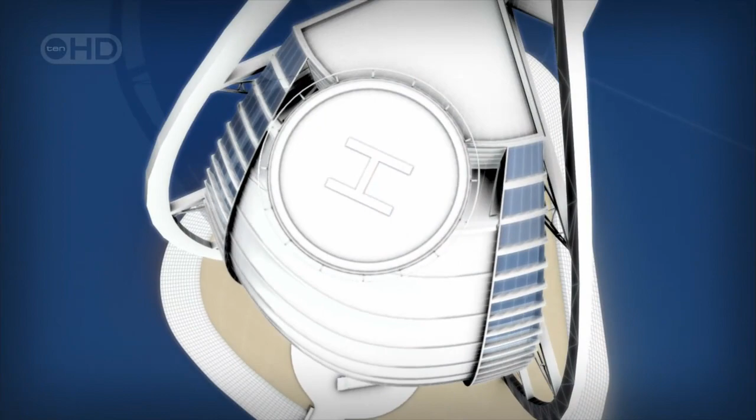He stakes what some speculate as over $1 billion on the tallest, most lavish hotel in the world, with a unique 7-star reputation: the Burj Al Arab. I think it was very important to put Dubai on the map of the world. There's no hotel like this hotel. It takes guts, and Sheikh Mohammed has a lot of guts.

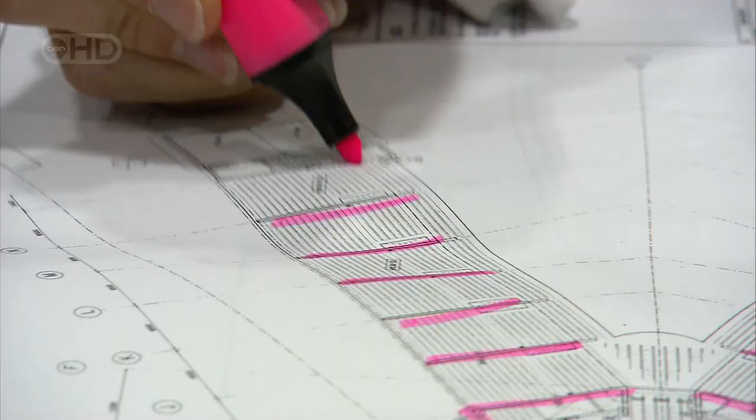The Sheikh's courage is clear from his choice of architects: a radical young team from Britain, brave enough to take up the challenge, but very short on experience. They are led by Chief Architect Tom Wright. We had an average age of 32, not a grey hair between us, and none of us had gone over about 15 stories. I was quite staggered by the scale and the immensity of the project. Tom Wright and his colleagues have a reputation for innovative engineering, but they're more used to designing schools and offices.

But Dubai is a place where connections can make all the difference. Through a contact in the ruler's office, the team gets its break. Sheikh Mohammed agrees to a meeting and is so impressed with their initial concepts, he awards them the contract. Now Wright must turn his sketches into a design so remarkable the building becomes a world-renowned landmark. We had many sleepless nights worrying that the building we'd designed wouldn't turn out to be at all iconic.

Wright knows he must push his design to the limits. A building only becomes an icon when its form is simple but unique. We decided that if you could draw a building simply with a few strokes of a pen, and it was instantly recognizable as not only the building but the place - Egypt in this case - you'd created something that was iconic.

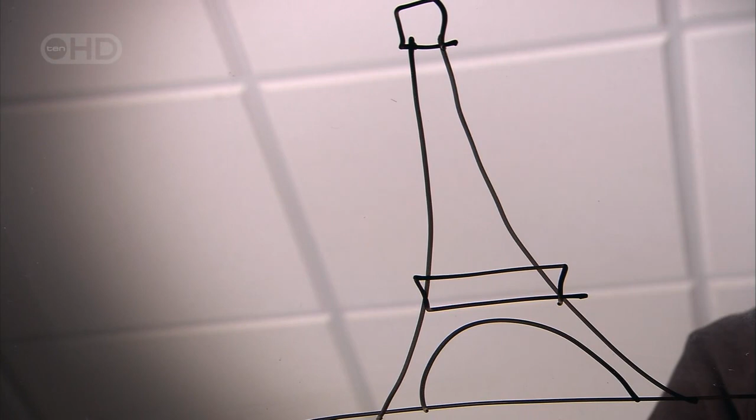So if you consider these buildings in the world, there are probably no more than 10 maximum that have actually achieved this status. Australia, Sydney Opera House. As with all these buildings, it's usually just the first couple of lines that actually make you know exactly where the building is. Paris - and you have to put a flag on the top.

Can Tom Wright and his team compete with the likes of Gustav Eiffel? This is a once-in-a-lifetime challenge. All the brainstorming pays off when Wright finally has his eureka moment. We were sitting there having a beer, watching a modern sailing yacht come out of the Dubai Offshore Sailing Club. You think of excitement, you think of exhilaration, and we went, hey, this must be the one. The form we came up with is very simple, and within a few lines, I think you can see that it has all the elements of an iconic building. It's simple and instantly recognizable.

The concept immediately catches the Sheikh's imagination. A sail billowing in the wind has deep meaning for the people of Dubai with their seafaring heritage. To complete the nautical image, Wright wants the structure to rise out of the water like a massive yacht. But this will require an island as a base, and there are none. Wright's undeterred—he proposes they build an island specifically for the hotel, a first for Dubai.

Constructing the hotel out at sea will significantly add to the risk and cost. Can Wright persuade his colleagues this radical scheme will work?

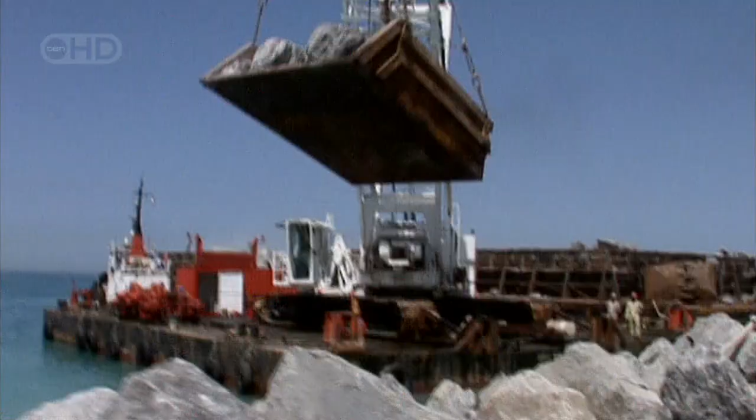By early 1995, the construction team is hard at work on Phase 1, building a low-lying island. But the inexperienced architects are about to get a taste of Dubai's extreme weather.

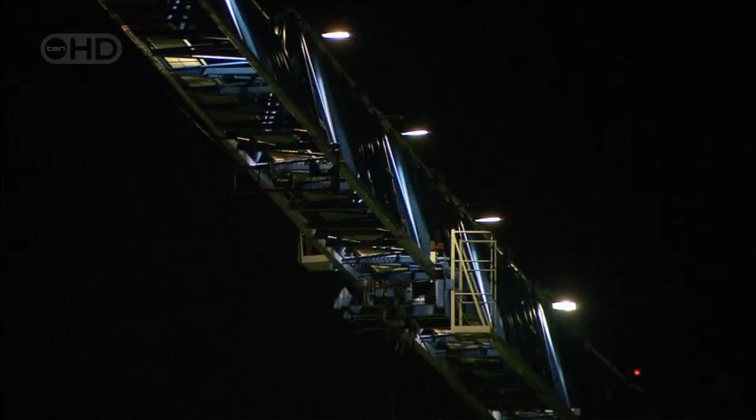April the 27th, a powerful storm known as a shamal sweeps across the Gulf, hitting the coast with a vengeance. A set of construction barges lie in its path, each laden with 10,000 tons of rock.

The architects have planned for all weather conditions, but the storm's intensity still shocks Simon Crisp. We had 3 or 4 metre waves bashing onto the beach. To see the waves coming in like this was really quite a wake-up call for us.

One huge barge breaks loose and slams into the mainland. The team realizes the damage this kind of storm could inflict on their island hotel. We had a really graphic example of how powerful the Gulf of Arabia can be when it's angry.

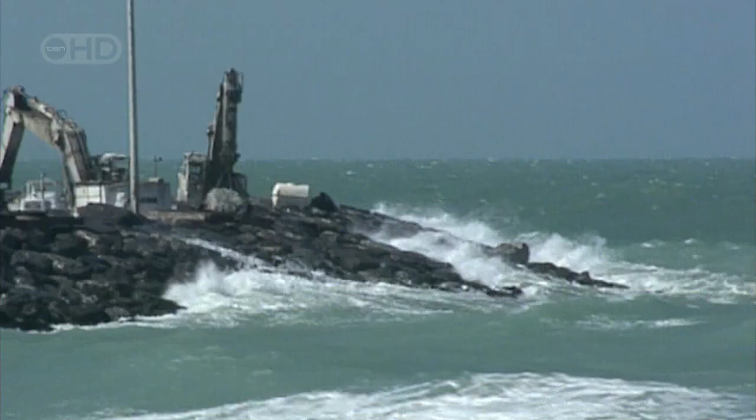The architect's decision to expose their structure to these forces could have serious consequences. The engineers will have to struggle to produce a low-lying island capable of resisting nature's fury.

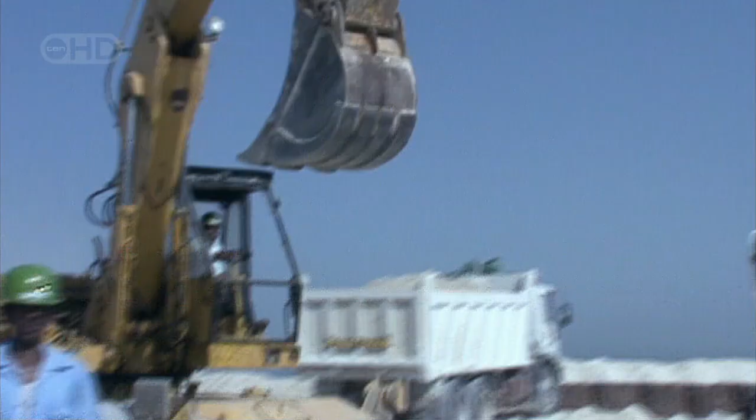The man-made island for the world's tallest hotel has hit a critical stage just 5 months into the build. Dubai's Sheikh Mohammed is depending on this project, the Burj Al Arab, to convert his country from oil producer to top-class tourist destination.

But a debate rages over the island's height. Architect Tom Wright wants to make it low to give the impression of a sail rising out of the water. We argued a lot about the height of the island. From a design point of view, I wanted people to be close to the sea.

From the start, he's gone head-to-head with engineer Mike McNicholas, who's responsible for the island's safety. So I wanted the island as low as you possibly could, skimming the sea. I'm coming from the other end—I needed to make sure we were protecting the island.

McNicholas's worst fear is that waves breaking over the island could damage the hotel or even drag guests into the sea.

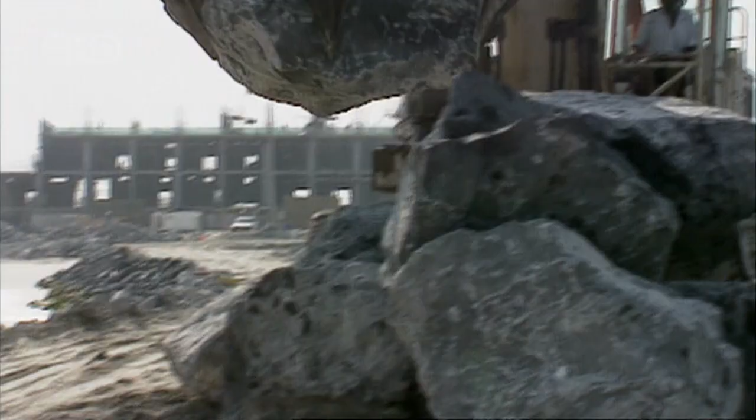Initially, the engineers planned to build the island using rocks. They are available locally and the technology is proven. But Wright rejects this—a rock island would have to be far too large to repel the sea safely.

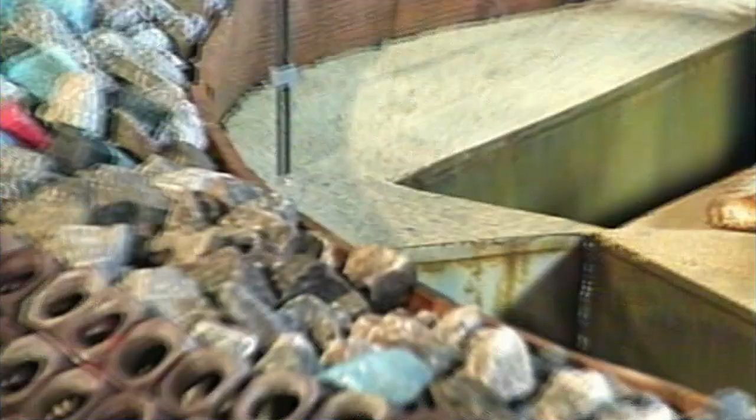To keep the island low, McNicholas experiments with pioneering concrete blocks designed to reduce the impact of waves. But no one in the Gulf has ever used these blocks before. I had to insist with the team that we carried out tank testing. It was the only way we were going to be sure that the island would be safe.

These tests replicate the power of the tallest waves that can occur once in 100 years, sending them crashing into a series of differently configured models. 3 weeks of testing prove the hollow blocks will work.

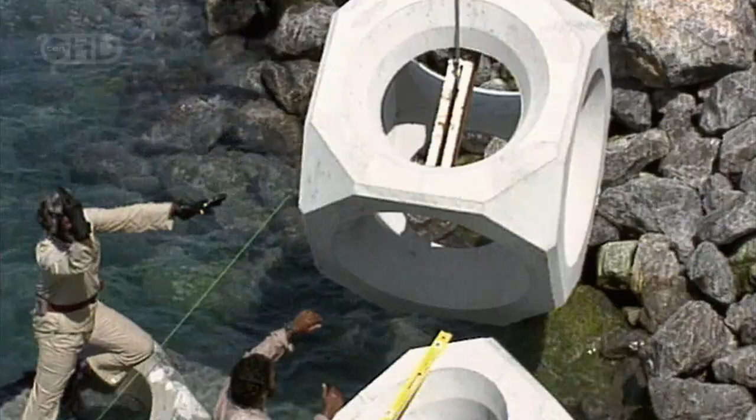The construction team builds the island with steep rock slopes, then covers them in concrete armor to absorb the force of the waves. These ingenious blocks work like a sponge—as the wave hits, the water passes inside the space and turns around on itself. The force is largely dissipated.

With the engineers' help, architect Tom Wright has won his battle for a secure island that rises only 7.5 meters above the waves. Now the team begins the second stage of construction.

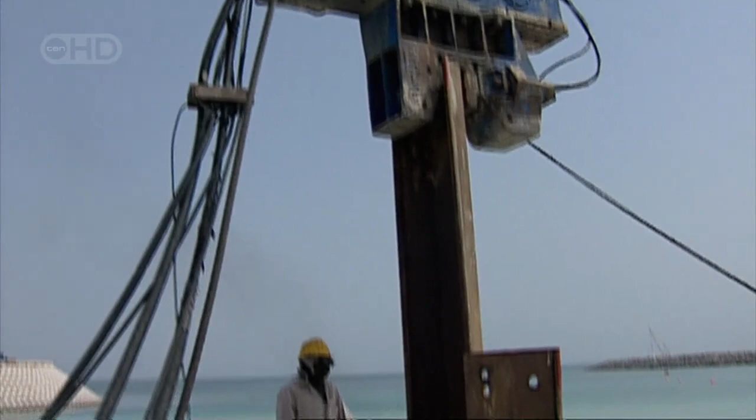In the center of the island, construction workers drive huge lengths of steel 20 meters into the ground. This creates a triangular steel wall known as a cofferdam, which will become the outside of the hotel basement once they excavate the sand from inside.

But removing the sand could be dangerous. That was a real challenge for us. It's sleepless days and nights, seven days a week, figuring out how we were going to stop the seawater coming into the structure, and stop it coming around our structure from beneath and flooding it.

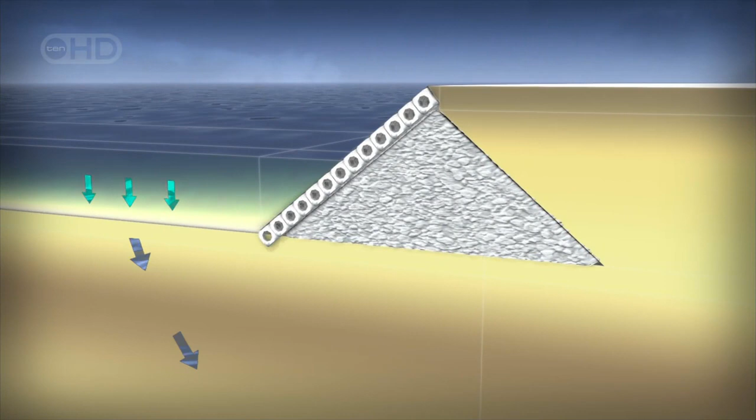The weight of the sea is a huge force on its bed. This pressure forces water through the sand and threatens to flood the artificial island from beneath.

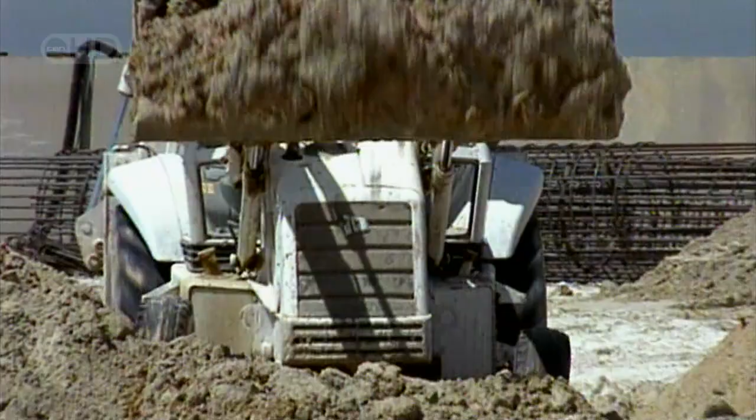To keep the sea out, McNicholas injects liquid cement into the sand to seal off his steel wall from below. But as the sand is removed to form the basement, there's less and less weight to hold back the force of the sea. The cement seal is going to be tested to the limit. In the worst case, the pressure caused by that water movement could have blown the whole bottom of the excavation like a champagne cork.

If McNicholas's calculations are wrong, the excavation could be swamped, killing hundreds of workers. But he stands by his design. With the cement seal in place, the excavators begin to remove the sand.

As the man responsible, he's not going to let the workers face the risk alone. I felt I had to be one of the first guys down at the bottom of the excavation, looking up 10 meters above myself, thinking, each side of this cofferdam is 7,500 tons of sea pressure pushing in.

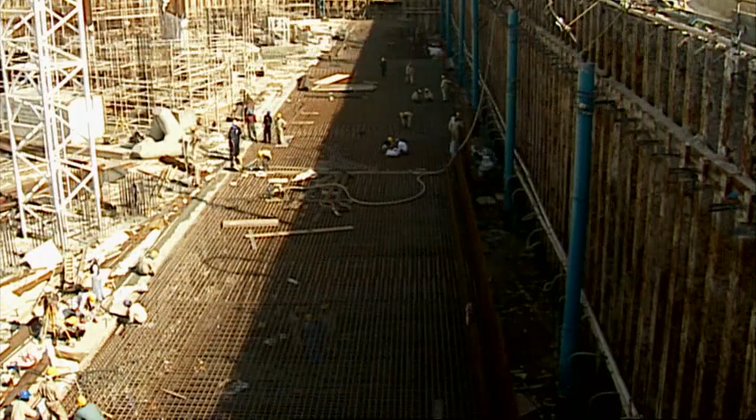When put to the test, both wall and seal hold firm. And one of the probably proudest moments of my career was being stood on that excavation and looking around and seeing the steel wall there surrounding me and thinking, we are holding back the sea. My design worked.

November 1995. The artificial island for the tallest all-suite hotel in the world is now complete. The construction team starts phase 3 of this one-off project, the foundations. The support needed for any skyscraper is vast.

But the location of the Burj Al Arab presents an added challenge. It had never been done before to build something like this on reclaimed land. We're talking about a 300-metre high tower on a man-made island in 6 metres of the Arabian Gulf.

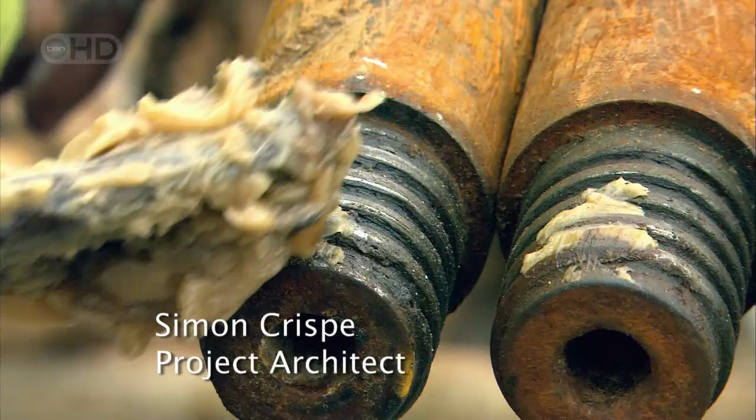The problems multiply when the results of earlier core tests reveal bad news. The team searching for bedrock drilled deep into the seabed, but even a full 180 meters down, there was no solid rock. This will make their job tougher, but the architects remain defiant.

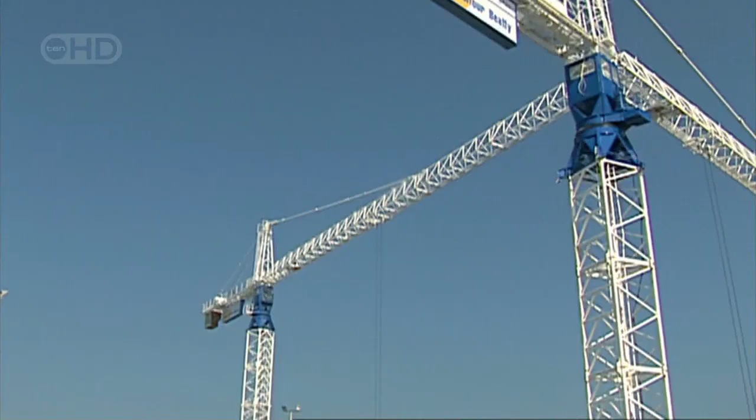The average person would think we're crazy to build something like this on sand, let alone out in the water. How will this 300-meter structure stand firm against earthquakes and winds of close to 150 kilometers an hour when its foundations depend on nothing more substantial than sand?

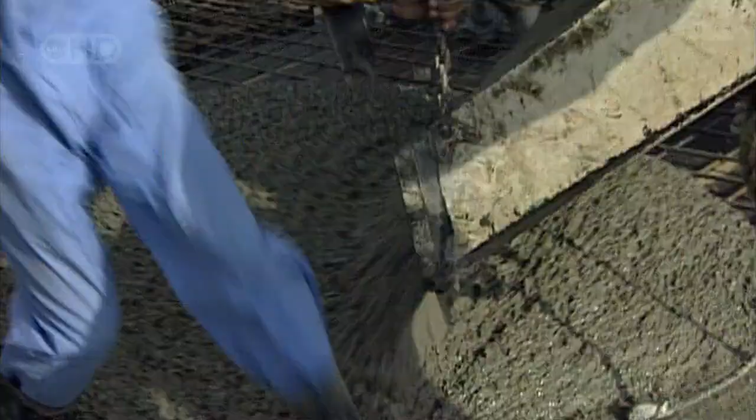On an artificial island 270 meters off the coast of Dubai, construction workers are preparing the ground for the tallest hotel in the world, the Burj Al Arab. But there's no bedrock beneath the site to support the foundations for a skyscraper.

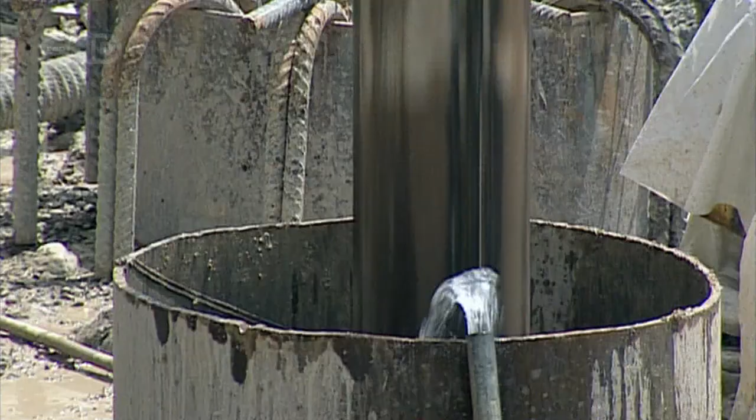The architects have a plan. They want to support the Burj using steel-reinforced concrete foundation piles drilled deep into the sand. So what's to stop the whole structure from just sinking? They are relying on an effect known as skin friction, the resistance that stops two rough surfaces slipping past each other.

Skin friction is all about the contact between the sand and the surface of the pile, and the longer the pile, the further in the ground it is, the greater that effect. I'm going to demonstrate it now by whacking it in. You'll see it starts to move quite quickly with the first few impacts. Now it's starting to stiffen up a bit. Even though I'm not hitting it any harder or any softer, the skin effect is starting to really kick in here.

Once the friction between the post and the sand around it equals the load of the hammer, the post comes to a halt.

The scheme will only anchor the Burj if the sand is compacted enough to create resistance around the building's piles. The drillers pack sand samples into sealed containers and send them off to be analyzed. If the results show the sand is too loose, then support on the piles anchoring the building could suddenly fail.

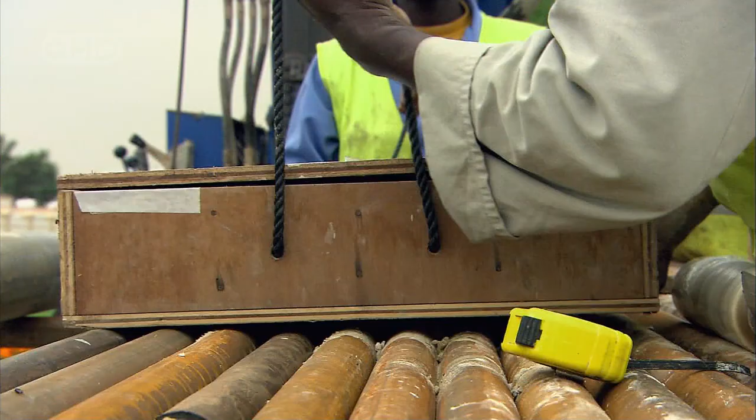The geography of Dubai gives everyone reason for concern. It lies within range of a major fault line, so this soaring megastructure could be vulnerable to earthquakes.

In June 1964, a 7.5 magnitude earthquake hits Niigata in northern Japan. Because the area is built on sandy silt, the tremors flip over entire apartment buildings. This isn't normal earthquake collapse. It's a devastating phenomenon known as liquefaction.

As grains of loose sand shake, they fill up any air pockets and compact, taking up less space. The ground stops behaving like solid earth and acts like a liquid. On shifting sand, any building could simply topple.

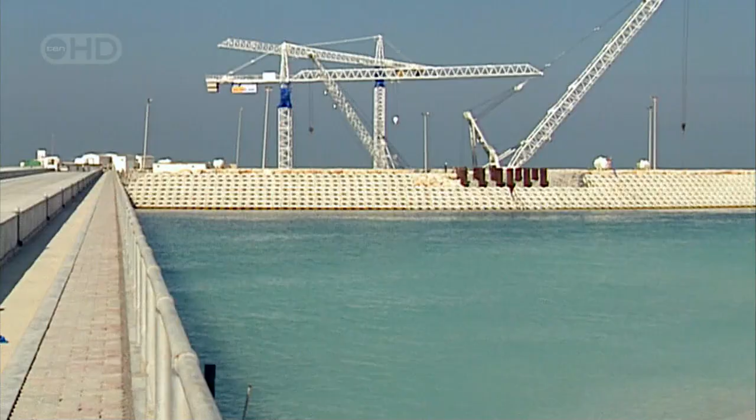When the results of the drilling tests return, it's good news. Deep beneath the site, they find compacted and calcified sand. Liquefaction is not a threat. But will the foundations be long enough for the skin friction to hold them firm? We weren't going to take any chances, and we extended the piles by another 8 meters.

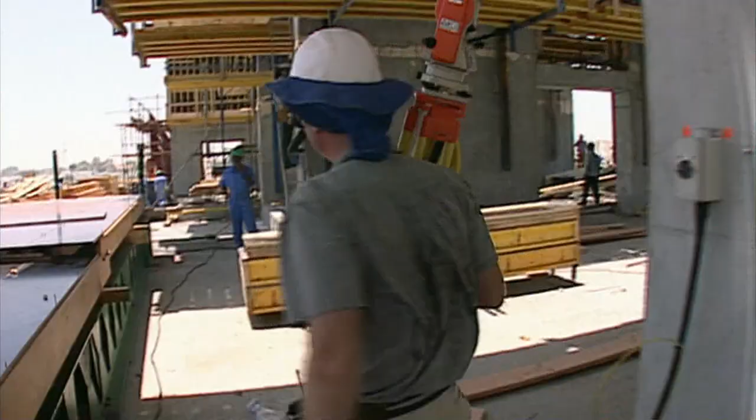One by one, the engineers are solving the challenges thrown up by this extraordinary structure. But in 1996, they brace themselves for a new set of obstacles as Phase 4, the construction of the hotel itself, begins.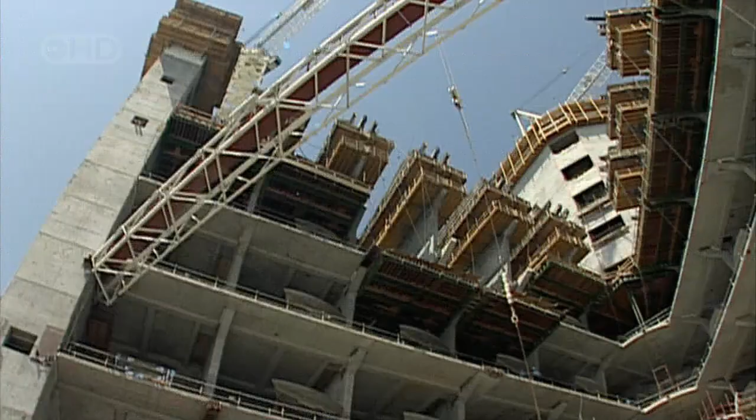This building had to stand up to the worst that the Gulf could throw at it. The hotel itself has slender concrete walls, not capable of withstanding the elements alone. To hold them firm against high winds and earthquakes, the architect devises a visually stunning solution: a gigantic steel structure outside the main building, known as an exoskeleton. A series of vast diagonal trusses tie two huge steel bows to the concrete core at the back of the building.

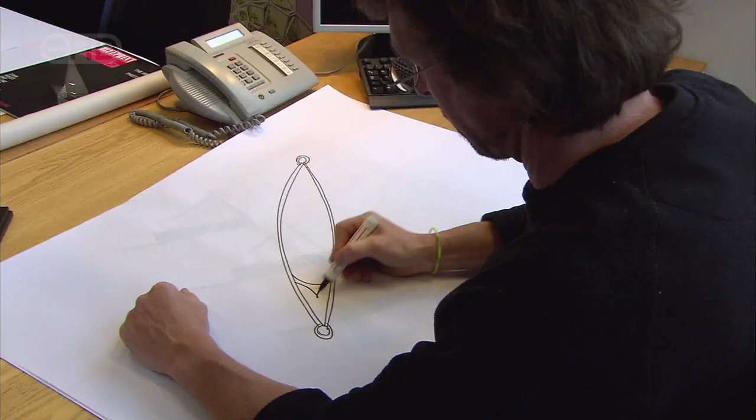Wright's design will make the building unique. But his giant diagonal trusses will make life hell for Anthony McCarter, the engineer who has to make them work. Those trusses gave me 4 months of heartache, sleepless nights, worries, anxiety. They must be incredibly strong to tie the exoskeleton together. But aesthetics are just as vital. It was critical that these diagonals were very, very elegant and also very beautiful, as they're so visible.

This building has to wow the world and make Dubai a must-stop destination. Wright's not about to compromise. I used to go to Tom with option after option. I remember one particular occasion where I had 7 options and he went, no, no, no, no good, no good, no good.

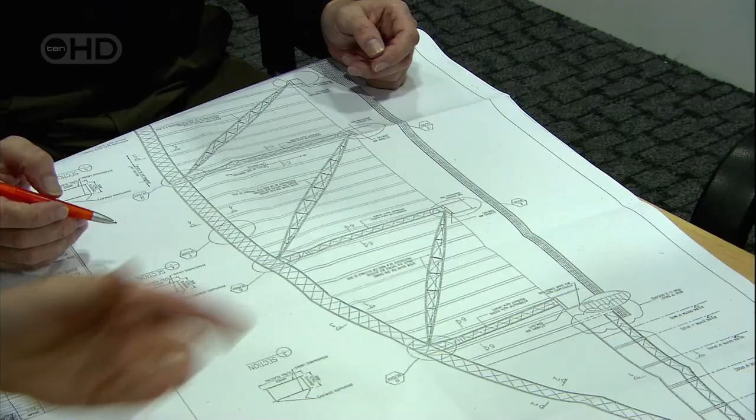Eventually, McCarter finds a form that works structurally and is graceful enough to fit Wright's vision. But this in turn causes nightmares for Malcolm Murphy, the chief contractor. It's okay for the architect to draw pretty pictures, but we have to build it.

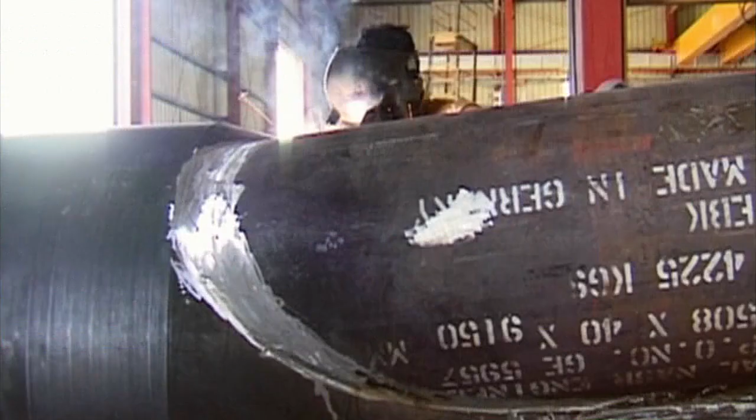He finds a factory just 15 kilometers from the construction site capable of welding the huge diagonals. Each one is longer than the Airbus A380 Super Jumbo and heavier than 20 double-decker buses. Welding these complex forms in the factory is the easy part. Transporting them to the site is not. With each truss weighing in at 165 tons and reaching a staggering 85 meters in length, it's no easy task.

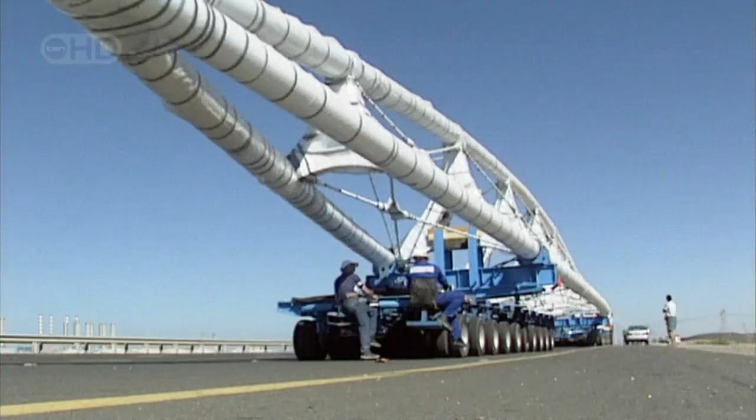And the challenge is to do that. It's just unbelievable. No one has ever transported anything this size before in Dubai. But Murphy's not going to be beaten. He brings in one of the world's largest heavy lift transporters, a beast with a total of 80 wheels. It makes the slow journey to the construction site at an average speed of around 6 kilometers an hour. Police must close roads and remove traffic lights to allow this convoy through.

When they finally reach the site, the contractors face their next hurdle. These 165-ton beasts have to be lifted into position. The architect refused us point blank to position these things in 3 pieces, which we wanted to do originally. And he said, no, aesthetics, I'll not let you weld up there.

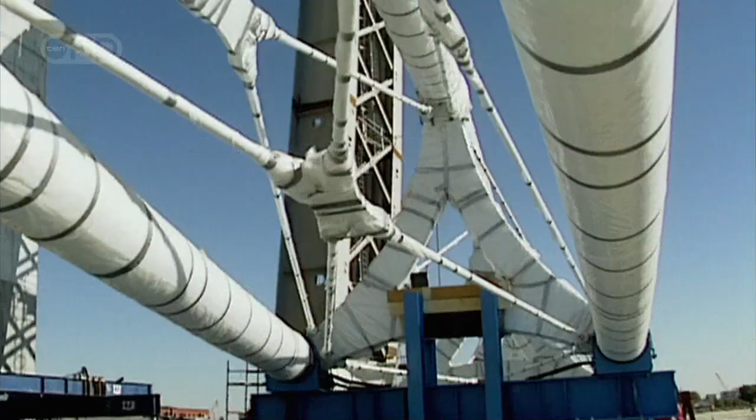He has to find a way to lift the trusses in a single piece to a height of almost 200 meters, twice the height of the Statue of Liberty. We had to go away and think of an idea how to actually lift these monsters up. We had 3 big monster cranes in there, and even they weren't big enough to lift the diagonal trusses.

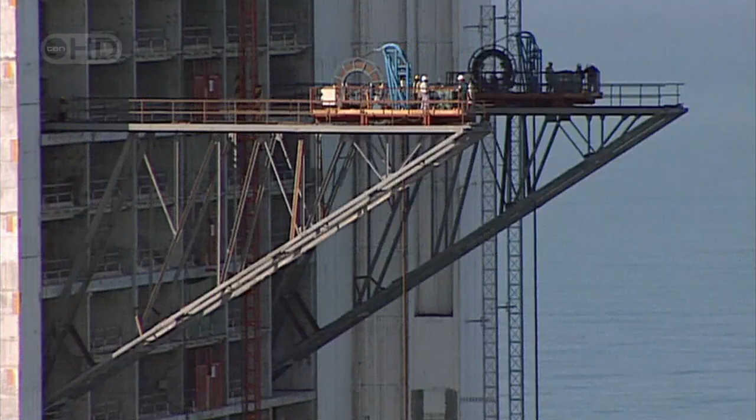Murphy must look further afield for a solution and brings in specialist lifting gear from Singapore. His team sets up winches, like those used on offshore drilling rigs, high on cantilever frames 15 meters from the building. Cables with a breaking strength of 225 tons are attached to the end of the truss. I can assure you we were very, very nervous that morning when we lifted the first one. 30 or 40 guys had sleepless nights that week, getting ready for that first lift.

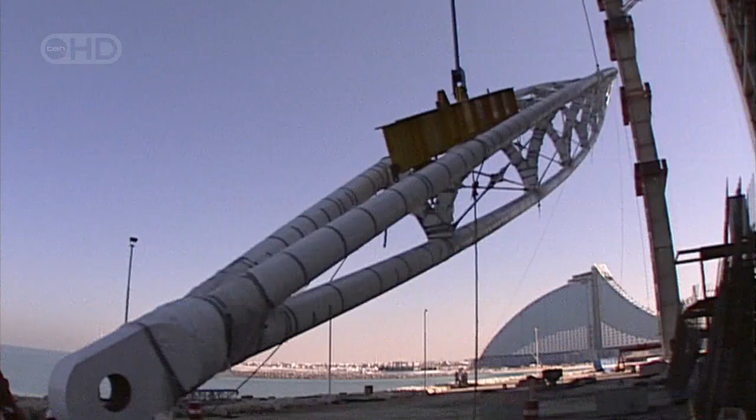The two massive winches take up the strain and painstakingly raise the diagonal truss little by little up the side of the building. It's all going to plan. Murphy and his team have solved the lifting dilemma. But these trusses have a sting in the tail - they need to fit into place with pinpoint accuracy.

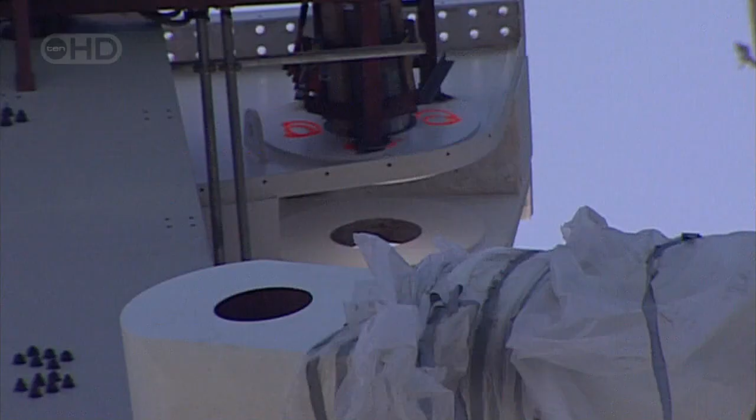But Dubai's climate means temperatures can vary by as much as 14 degrees in a single day, and this will make the trusses expand and contract dramatically. The problem's known as thermal expansion - the steelman's nightmare in the desert, working at 50 degrees C. Steel expands in the heat and contracts when cold.

Okay, chaps, light up. We're actually going to heat the steel up now, which is going to give you an idea of what temperatures we're working in the desert. Heat makes the steel molecules move faster and further, and this 15-meter tube actually grows in length. The difference is visible. What did I tell you? Steel does expand with the heat.

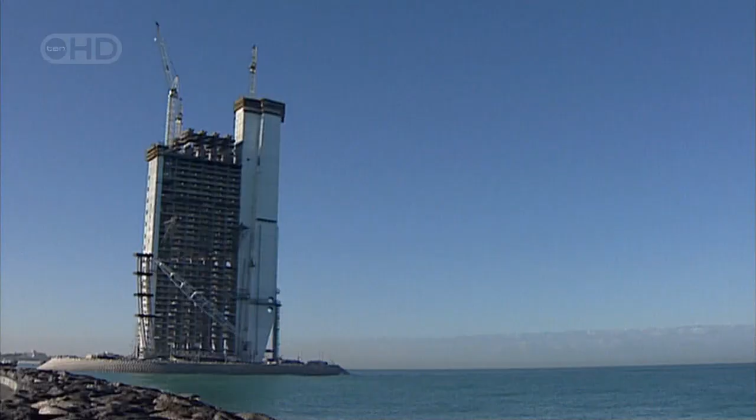The diagonal trusses on the Burj Al Arab could expand and contract by a full 5 centimeters over a 24-hour period. They will never fit their precise point in the framework without an ingenious solution.

The engineers thought about it, the structural fabricators, the steel fabricators, the architects - everybody thought about it, and it was actually one of the architects who came up with this great solution.

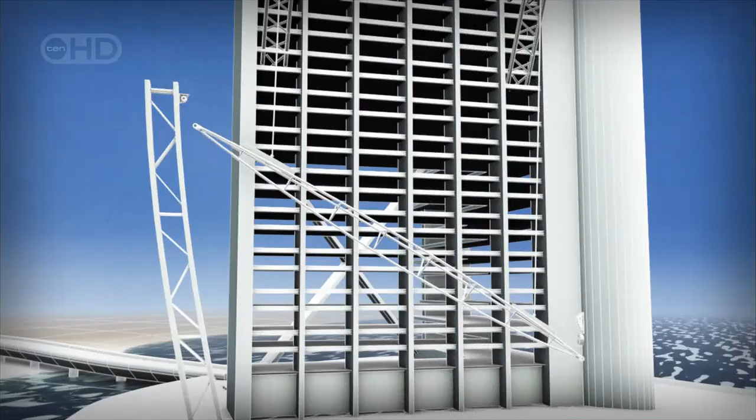On the frame of the structure, the fixing bracket contains a vast washer with its hole offset from the center. This swivels until it lines up with the hole in the diagonal truss. Then the cast steel pin, about 30 centimeters in diameter, is inserted through both holes, locking them together. This clever device buys the team the crucial 5 centimeters of play they require for the installation, and the truss is now fixed securely in place.

When we got that pin in, we had those champagne corks flying. It was just unbelievable. But there's precious little time for celebration.

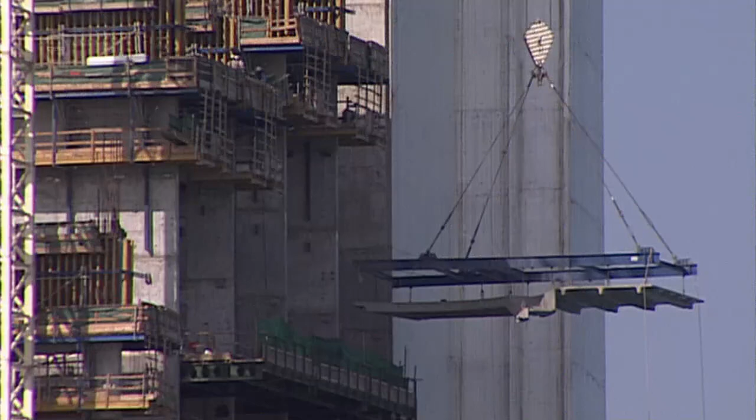The first VIP guests will arrive before the millennium. This leaves the team less than 36 months to complete the entire project. Sheikh Mohammed's vision for the Burj Al Arab meant that it was needed yesterday.

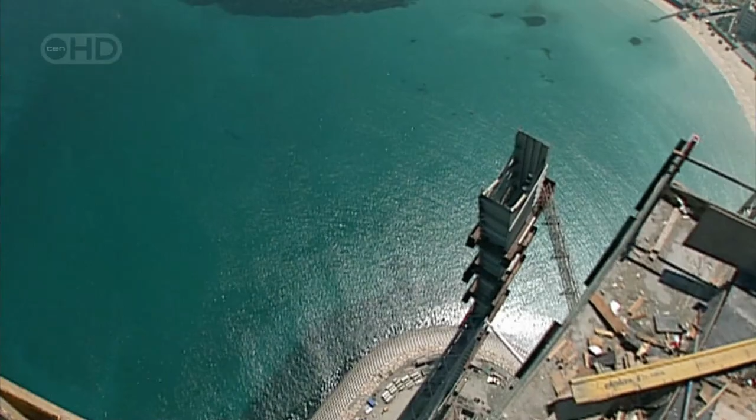January 1997. A colossus is emerging out of the Arabian Gulf. The Burj Al Arab is to be the tallest hotel in the world, the last word in luxury and a proud symbol for Dubai.

Architect Tom Wright wants the building to be beautiful. The steel sections of the exoskeleton that will support it must be as minimal as possible. The view from these $2,000 a night suites will have to live up to the price tag.

When you're in the suite, looking through the windows, they are right in front of you, so they have to be exceptionally well detailed and well put together.

But this creates a dilemma. If Wright makes the exoskeleton too light, the wind's force at 300 meters above the Gulf could shake the building apart. Too bulky, and the elegant form of his yacht-shaped structure is ruined.

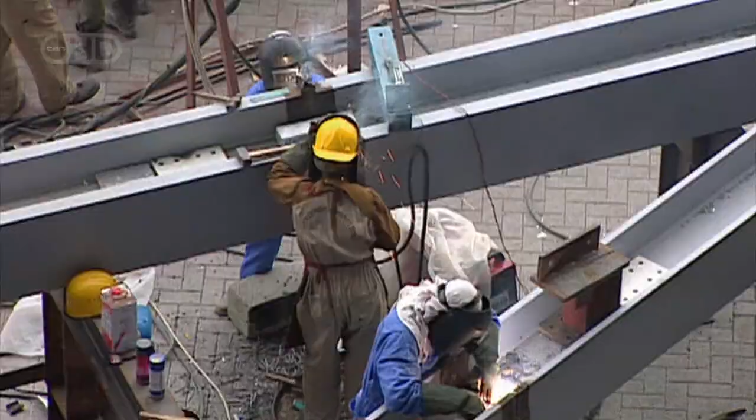Once again, Wright and the engineers, who must make his hotel safe, are on a collision course. When you're designing a building that is taller than the Eiffel Tower, and you've never done one before, you want to make sure that you've got it right.

This structure is so unusual. For the first time in Dubai's history, engineers decide to do tests in a wind tunnel.

Wind engineer Volker Buttgereit knows the Burj Al Arab is one of a kind. Before this building came along, most of the buildings in the Gulf were fairly orthodox shape - they were square, they were rectangular, they were nowhere near this scale. So doing a wind tunnel test for a building in those days in the Gulf was almost outrageous.

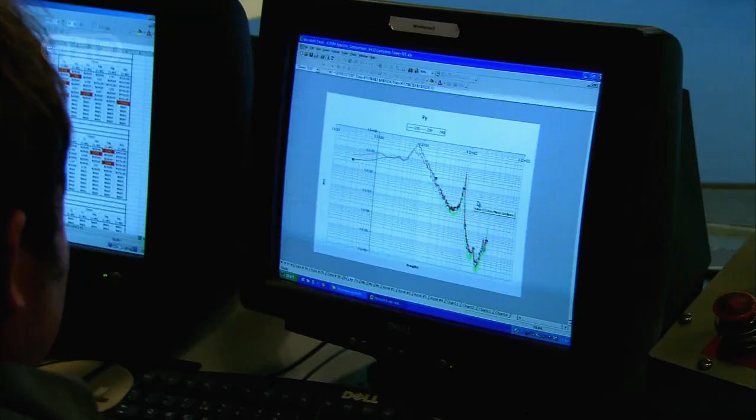This building has seen some pretty severe loads, almost twice what it would be seen in London. We measured suctions which were the order of the weight of a car hanging off, trying to suck the panel off the building. So that's quite something.

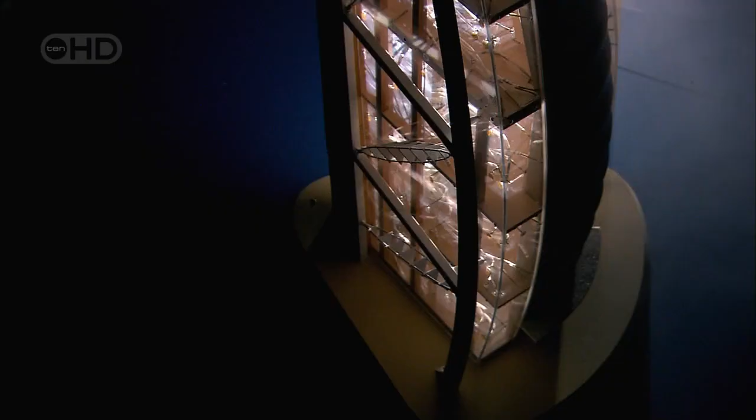The wind tunnel throws up results that could threaten the entire exoskeleton. When we first saw the design, there was immediate concern about vibration due to something called vortex shedding.

Vortex shedding is an engineer's nightmare. Certain wind conditions blowing over sharp edges on the steel structure can create miniature tornadoes. These set up dangerous vibrations that can shake a building to destruction.

Which is exactly what happened to these massive cooling towers in Ferrybridge, Northern England in 1965. The engineers must find a way to protect the Burj Al Arab.

The simplest solution is to change the aerodynamic shape, but that upsets the architect. The architectural idea of the exoskeleton structure is, when you look at it, the very essence of the building. If you take it off, it's just another building. If you put the exoskeleton structure on, you have an icon.

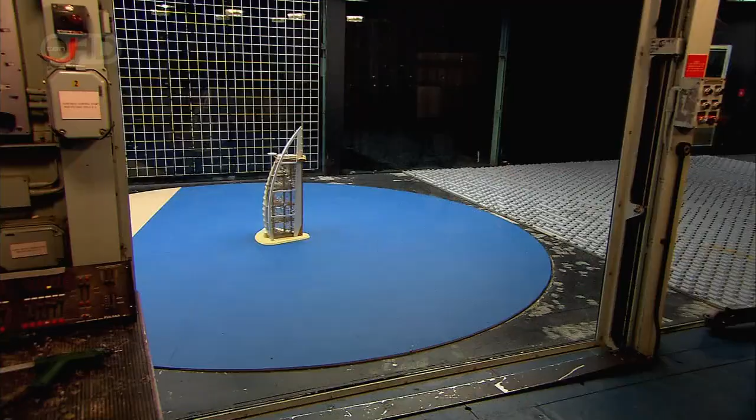The engineers need to think again. This is classic vortex shedding. We realized we had to come up with something clever that was not visible, but somehow reduced the motion.

They turn to an ingenious hanging weight called a tuned mass damper. These are installed at vulnerable points in the exoskeleton. When the wind blows and vortex shedding starts to create dangerous vibrations, the 5-ton weight will swing instead of the structure and damp down the vibrations to well within safety limits.

11 of these systems are fitted from the top of the 60-meter mast all the way down through each of the steel bow structures. These dampers safely cancel out the threat.

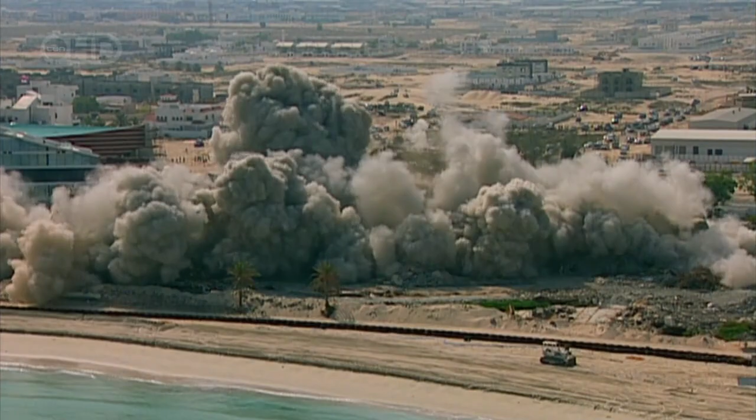June 1997. Dubai is reinventing itself as the luxury tourist destination. This old hotel bites the dust as the Burj Al Arab, the symbol of the new Dubai, approaches its final form. Just 30 months before the deadline, the crew begins constructing the toughest engineering challenge.

Sheikh Mohammed wants the building to amaze. So the design calls for a restaurant that looks as if it's suspended in the sky. I like the idea of the visitor sitting out in space, looking across the view towards the Arabian Gulf and Dubai, and sort of almost floating up in the clouds. The whole idea of hanging out over space would give you a dining experience pretty unparalleled.

The Al Muntaha, or Ultimate Sky View Restaurant, will soar 200 meters above the sea and project nearly 27 meters out on both sides from the building's narrow central core. Once again, Wright's throwing down a gauntlet to structural engineer Anthony McCarter. Can he secure this eccentric wing-like structure with no visible means of support?

When Tom first showed it to me, I must admit I thought he was crazy. This room is actually the size of most buildings, and Tom decided that he wanted to take it and stick it outside of the centre of gravity of the supporting structure. So there it was, dangling in the breeze with only the structural engineer to hold it up.

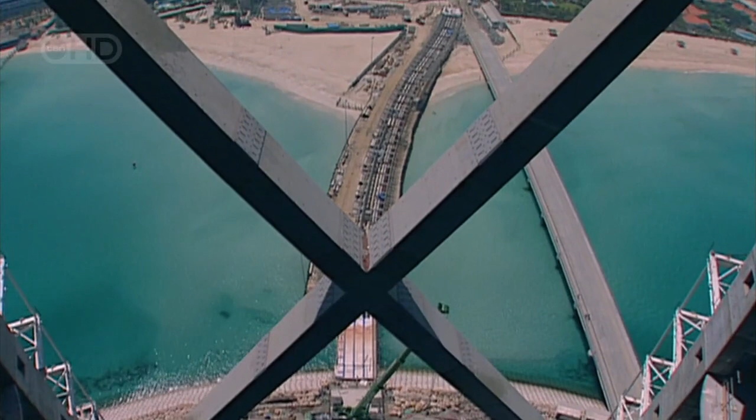And if the engineers get the calculations wrong, the whole thing could tumble 200 meters to Earth. McCarter finds a solution to the pull of gravity that pushes conventional engineering to new heights.

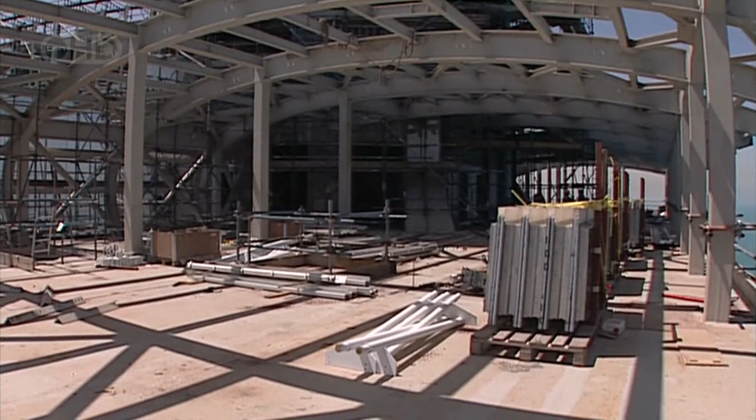In the concrete core at the back of the building, he casts a series of steel brackets known as embedments. 10 enormous steel girders radiate off them up to 1.6 meters high. These beams form the base of the rigid steel floor. The wing-like exterior can be attached to it, and then the entire restaurant is enclosed in aluminium and glass.

This gravity-defying structure will survive winds of close to 160 kilometers an hour. It's an engineering triumph.

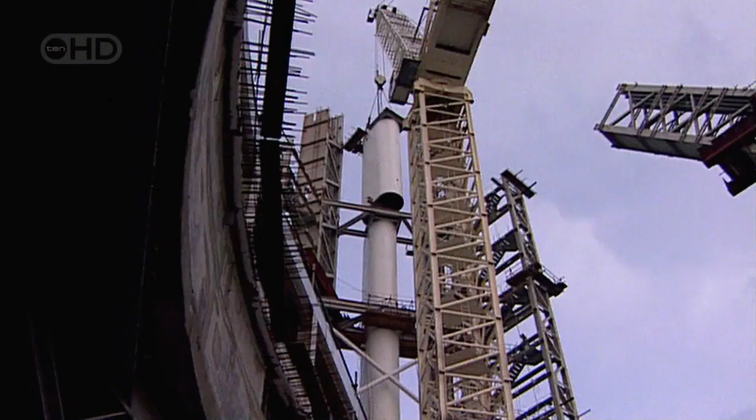But they are just 4 years into the 6-year program. No one can afford to take their foot off the gas. The program was relentless and challenging. 24-hour working, 6 o'clock, site meetings in the morning, every morning. You live, sleep, breathe the building. The challenge really was on, can we design it and finish it by the original program?

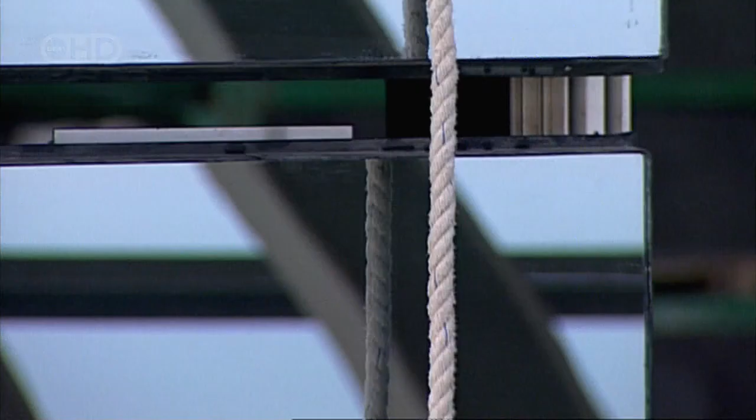The Burj Al Arab is due to open in time to celebrate the millennium, just 2 years away. The world's media are watching to see if the hotel will be the masterpiece the Sheikh promises, and if the team can complete it on schedule. The only way to deliver on time is to start the interior decoration long before the exterior is finished.

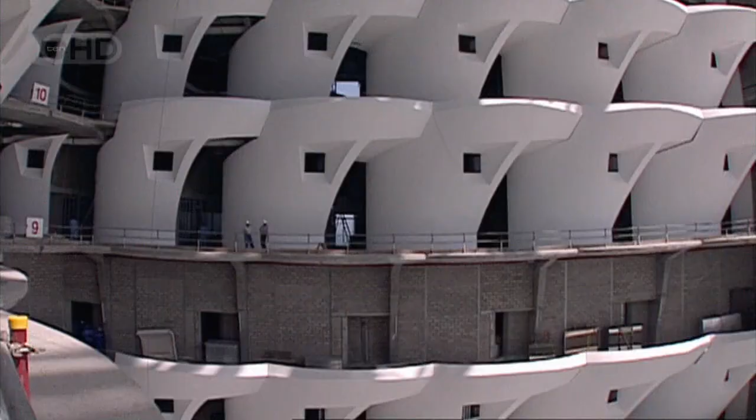In a temperate climate, this wouldn't be an issue, but humidity in Dubai reaches 100%, and temperatures can soar to a scorching 49 degrees. These conditions simply won't allow the team to fit delicate finishes like gold leaf, silk, and carved wood. If we'd started to put materials that were susceptible to moisture at that time, they would have just fallen apart.

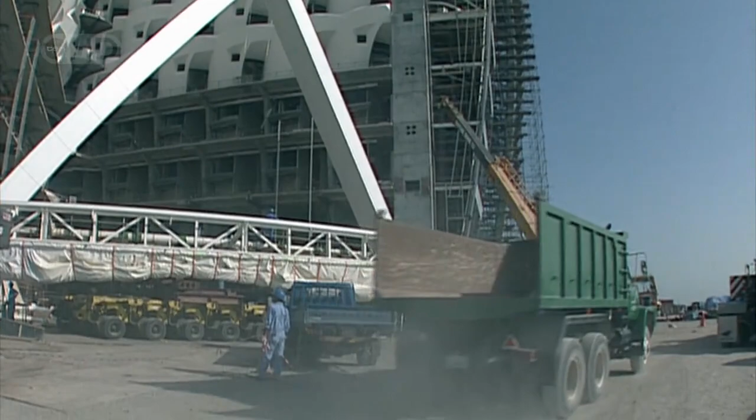To make the deadline, the contractors need to air condition this giant building site and bring the temperature down dramatically. The first step is to enclose the building by installing the final wall, Wright's iconic white sail. But it's going to be tough. When we first proposed the idea of the fabric sail wall, there was a lot of scepticism. People thought that it couldn't be done.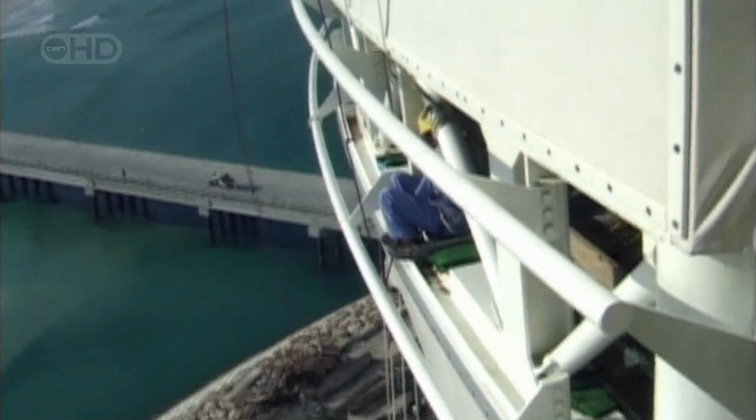They stretch woven glass fibre sections between huge horizontal beams. The surface is pre-coated with Teflon to resist dirt and sand. The result notches up another first for the Burj, the largest fabric wall anywhere in the world.

The reflective properties of the white sail will help keep the temperature down. But the contractors still need to find a way for trucks to enter the building without allowing in the desert heat. The solution is to install a huge airlock. Trucks drive in, the vehicle pauses as the doors close behind it. A second set of doors then open, and the vehicle moves out of the building.

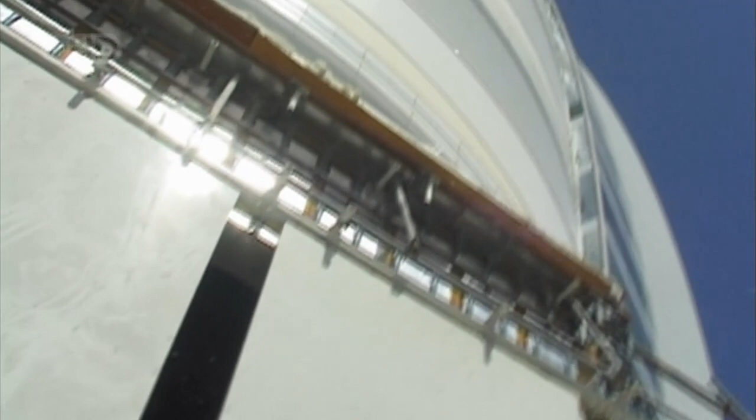The airlock and the sail wall now seal off the building. But cooling a space this large during construction could create a major setback. This unique structure now boasts the world's largest atrium, soaring to an amazing 180 meters.

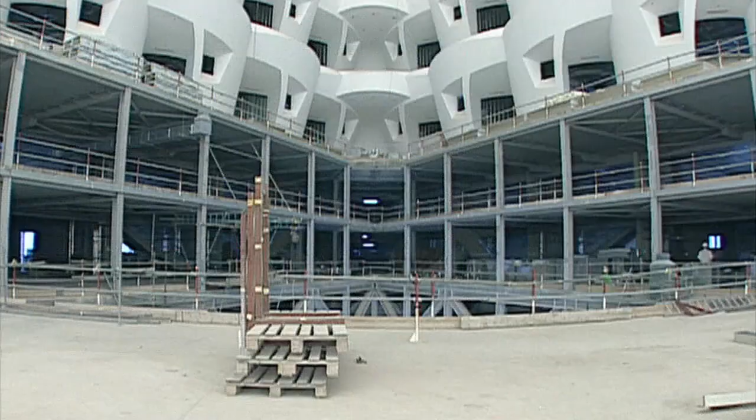All this warm air can hold far more water vapor than cold air. If they cool this hot, humid environment too quickly, they will create uncontrollable condensation. We could have had a rain cloud form at the top of the atrium and create massive damage to the interior design. The only way to avoid rain clouds will cost valuable time.

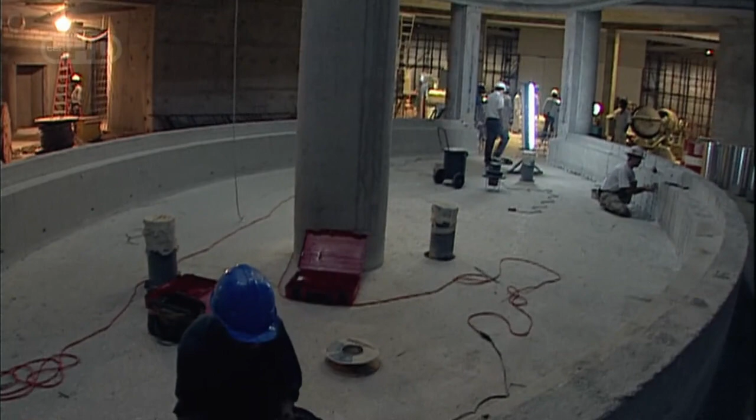The contractors switch on the giant cooling system and bring the interior temperature down steadily by less than 1 degree a day. Given the schedule, it's painfully slow. We started to cool the building down in June 1998. By December '98, it was pretty well down to temperature.

At last, the interior decoration can begin. But the hunt for a designer who can create interiors worthy of a sheikh causes further delays.

Khuan Chew, who's already worked for the Sultan of Brunei, knows exactly what it takes to satisfy royalty. It's great news when she agrees to take on the most luxurious hotel on the planet, with its daunting 202 palatial suites and the 180-meter atrium.

But she has just 24 months from design to completion to be ready for the guests booked in for the millennium. I had a very, very tight program. So what we did was that the entire office, all 50 designers, just dropped everything else. And solidly, we just worked on the Burj Al Arab.

She not only faces a frantic schedule, Sheikh Mohammed is expecting her to amaze the world. The brief basically asked us to design something that's never been ever designed before, and that will never be designed ever again.

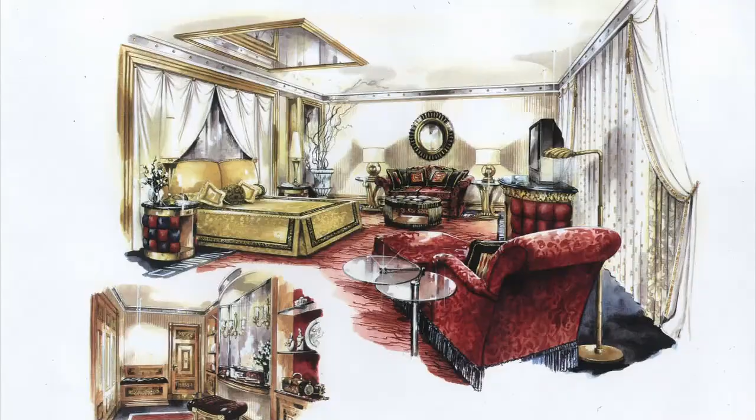Khuan Chew and her team pull out all the stops and begin to produce interiors they hope will match the Sheikh's ambition. But as they struggle to meet the deadline, another more severe problem comes up. The Sheikh wants to offer guests every conceivable electronic gadget in their suite.

This new requirement could have dangerous consequences. A new member of the team is suddenly in the hot seat. Electrical engineer Rob Roos faces the biggest challenge of his career.

There was a total redesign, or a total change in the interior design, and that imposed overnight almost a 50% increase in the electrical load of the building.

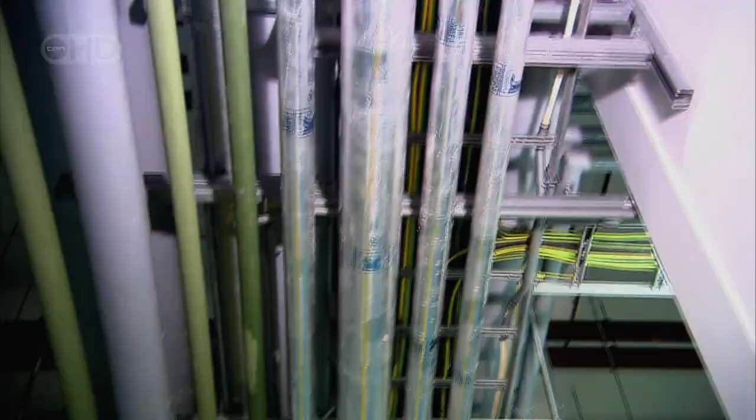The Sheikh's new plans mean each suite requires an enormous 14 kilowatts. That's 8 times the load of a normal European house for every suite. With 202 suites, that's roughly enough electricity for a town of over 6,000 people. The hotel will have electric curtains throughout, 52,000 lights, most of them on dimmers, and over 5,000 kilometers of electric cable.

All these electronics can scramble the waveform of the electric current and create a problem known as harmonic distortion. This can melt the sheathing around live cables and cause a raging fire. That was a situation which was just totally unacceptable. We had to deal with that.

The people of Las Vegas know just how lethal a hotel fire can be. November 1980, in the city's MGM Grand Hotel, a pair of electrical wires short-circuit. This causes a blaze that wreaks destruction. 85 people perish in this real-life towering inferno, and over 700 are injured. It's one of the worst hotel fires in history, all caused by a simple electrical fault.

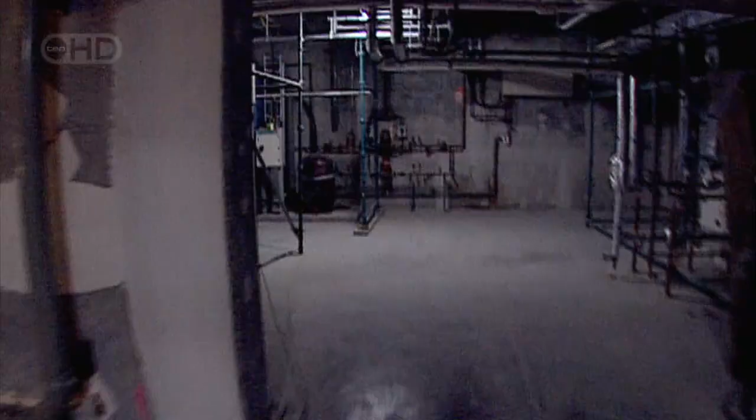Roos needs a solution to the fire risk, and fast. Obviously, the hotel was under construction. There were some fairly heavy deadlines to try and get the hotel finished and opened, and this was a major change. His response takes electrical engineering to a new level.

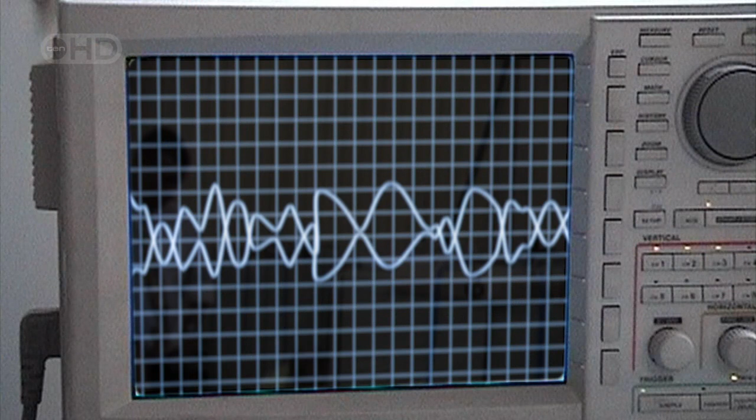He devises a harmonic filter system. First, it detects the electronic distortion, then it sends a current that's the mirror image to cancel it. It's called antiphase and works like noise-cancelling headphones. He installs his filters on key floors, and at the point the electricity enters the building.

No one has ever attempted a system on this scale before. This was the largest active filter installation of its kind in a building like this anywhere in the world. A world-class solution for a world-class megastructure.

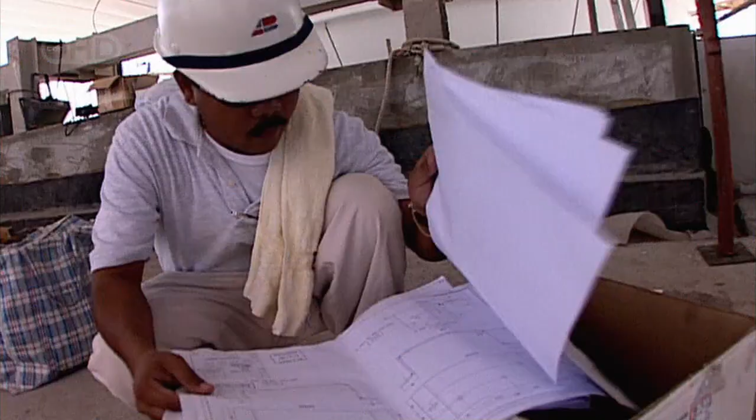The team constructing the Burj Al Arab can claim a string of groundbreaking achievements. They build the first artificial island off the coast of Dubai, construct the tallest atrium in the world, enclosed by the largest fabric wall ever built. And with the mast finally in place, this structure, for now at least, is taller than any other hotel on the planet.

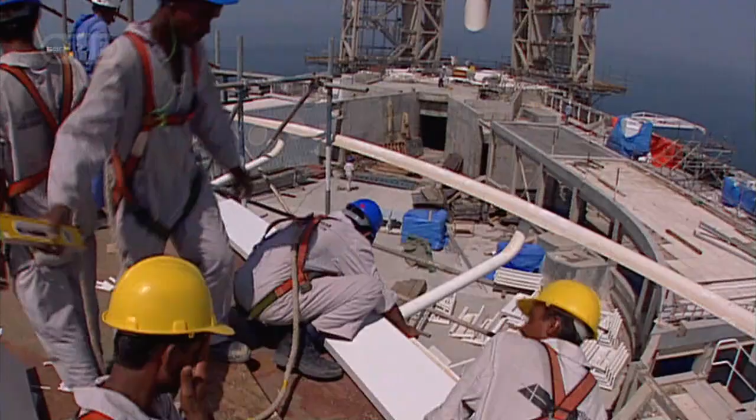Now, 5 years into the project, the team reaches an important milestone. The iconic exterior is almost complete, but the interior decoration of the world's most luxurious hotel is seriously behind schedule. This stage has always been a race against time. Now Sheikh Mohammed is about to send the design team into a tailspin.

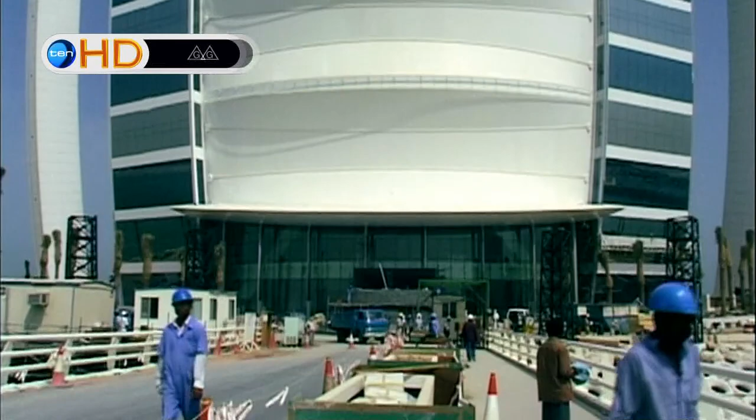Dubai, April 1999. The world's tallest and most opulent hotel is approaching completion. Everyone is rushing to finish the hotel, ready for the Millennium deadline. Interior designer Khuan Chew is still operating in overdrive. Christmas was cancelled, Easter was cancelled, bank holidays were cancelled. We basically made 50, 60-hour weeks.

Her brief from the Sheikh is to shock, to innovate, to amaze the guests with a modern Arab palace. And she delivers in spades with over 24,000 square meters of marble from Italy and Brazil, the equivalent of nearly 3 soccer pitches. Over 8,000 square meters of 22-carat gold leaf give the desired impression of luxury. And she completes the appearance of total indulgence with crystal chandeliers, woven silver and velvet. But for the world's largest atrium, Khuan Chew makes a radical decision. She goes minimalist. She lets the complex architecture speak for itself by painting it all white.

The interior decoration is almost back on schedule. Then comes the moment of truth. Sheikh Mohammed arrives to examine her work and pass judgment. The man behind the whole project is delighted with the ornate styling of the luxury suites. But that's where the good news ends.

I was summoned and said, when are you finishing off this atrium? I said, well, it's nearly done. Unfortunately, the feedback was no, where's the color?

The Sheikh completely rejects the white styling of the atrium. It's just too plain. Not exciting enough, not bright enough, not colorful enough, not rich enough. Khuan Chew has to completely redesign and decorate the tallest atrium in the world in just 6 months. I was basically living and sleeping in the Burj Al Arab, rushing from area to area.

This is her last chance to get it right, so she sets out to dazzle. She designs a light show to animate the world's tallest fabric wall. Fountains create aqua gymnastics in the lobby. Vast fish tanks welcome visitors as they ride the escalators. And crucially, she transforms the view up the atrium into a rainbow palette of vibrant colors.